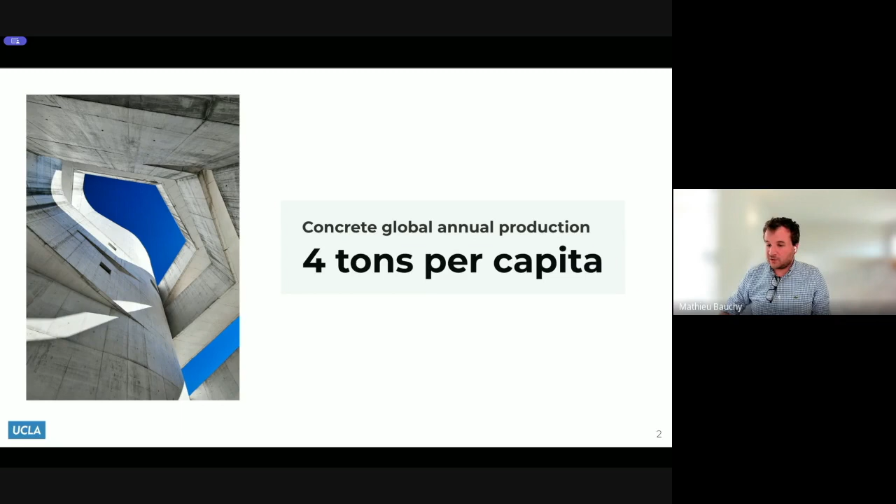And the thing with concrete is that because we produce so much of it, it comes with a cost—the cost of very significant CO2 emissions. Again, it's not so much that concrete on its own is very carbon intensive, but it's more about the scale of how much concrete we produce. So this is really what we have been trying to do, is to see how we can use new developments in AI and machine learning to tackle this and try to reduce this carbon footprint of concrete.

So I'd like to tell you a little bit more about the problem we're trying to solve, the carbon footprint of concrete, and then I'll show you how we have been using machine learning and AI to try to reduce concrete's footprint.

When we think about the carbon emissions due to concrete, it corresponds to roughly 8% of global CO2 emissions. That doesn't seem like a lot on its own, but when you compare it with all the emissions from aviation, which is only 2%, concrete alone is responsible for 4 times more emissions than the entire aviation industry. So it's really a significant contribution, much more than any other material.

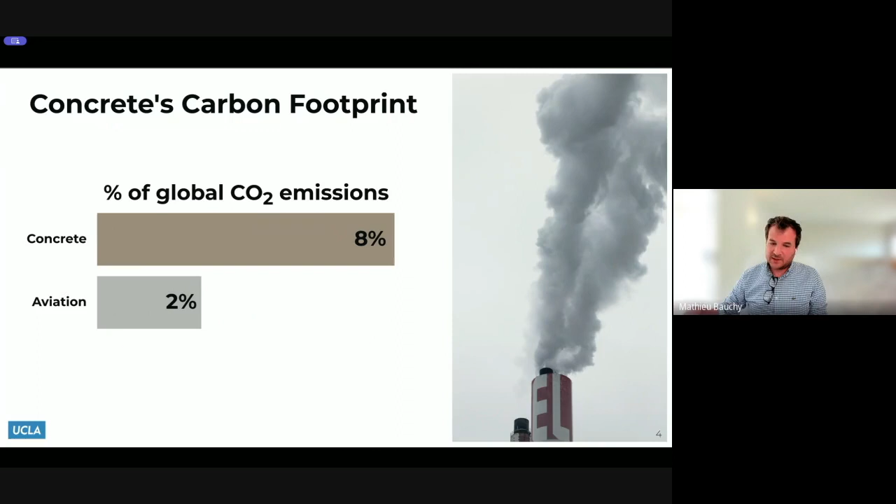So there's really an urgent need. The problem is that, like all other industries, they are decarbonizing—transport has electric cars, energy is transitioning to either nuclear power or green power—but concrete is very hard. It's a heavy industry. There are thermodynamical limitations regarding what you can do to decarbonize concrete. So those heavy industries like concrete, steel, glass, are to some extent the hardest to decarbonize.

When you think about the carbon footprint of concrete, there are different contributions from the very beginning of its production to the very end of the life cycle of an infrastructure. For an accurate description of the embodied CO2 associated with concrete, you need to take all of this into account. You need the A1 contribution—this is the emissions due to raw materials like cement, the aggregates, all the raw materials that go into concrete. Each has an associated A1 contribution due to their manufacturing.

Then you have the A2, which is the transport—we need to transport those materials like cement up to the concrete plant. Then there is the manufacturing of concrete itself, for example the energy consumption of the concrete plant. After that, once concrete is made at the plant, we need to deliver it to the job site, so that's the A4, etc.

Then there's everything related to the use of the infrastructure—any repair, any maintenance, etc. All of this goes into the overall carbon contribution of concrete. And then everything related to the end of life—the decommissioning, the recycling, all of this. What I'm really interested in is the beginning, what we call cradle to gate. That's what I'm going to talk about today.

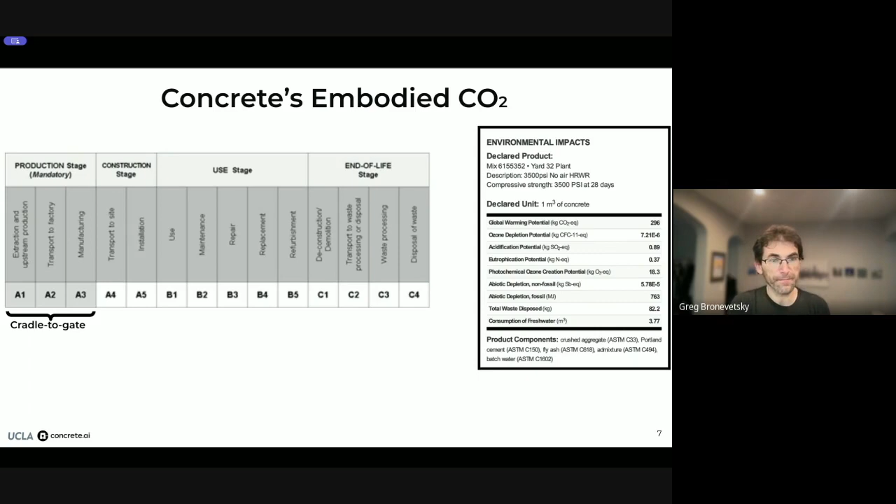Question: what fraction of the overall emissions are these stages? Yeah, I mean, it's like...

Those initial emissions, to some extent, are the best quantified, because there's a clear methodology to quantify carbon emissions due to concrete manufacturing - A1, A2, A3, and then A4 and A5 which is transport, purely the transport in the concrete truck, a fairly small contribution compared to cradle to gate. The problem with everything related to B and C is it's very hard to quantify. You need life cycle analysis, and it's hard to estimate the lifetime of the infrastructure you build, so it's hard to give a good answer about that.

For everything regarding B and C, there are already some good solutions - higher thermal efficiency, maybe alternative solar or renewable energy, things like that. So there's already effort to reduce the service life emissions of the infrastructure. But it's still really the production itself that remains hardest to decarbonize, because you can't use renewable energy for that. So I don't have a good answer about the exact fraction, but it's significant for sure - certainly a decent fraction, probably more than 50% if I had to guess.

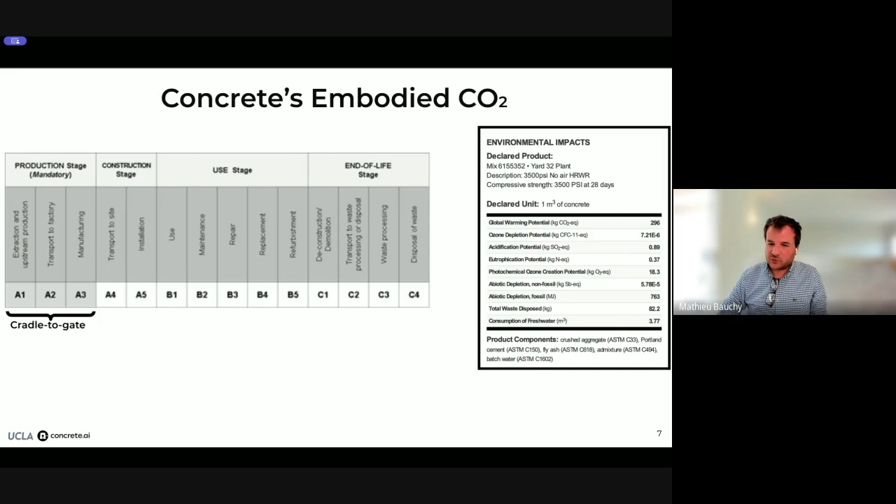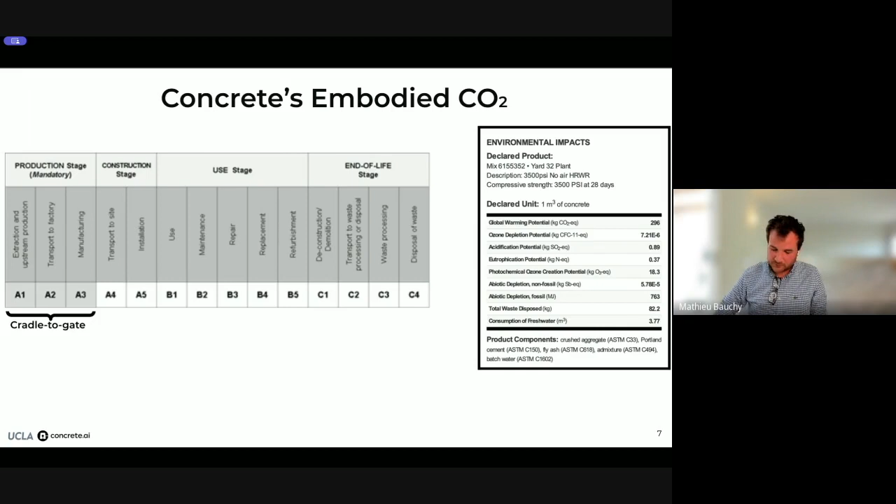Global warming potential is just one of the negative aspects associated with concrete production - that's the one I'll focus on, but there are other hidden costs concrete production has. At the end, what you get is a number - the global warming potential - quantified as a CO2 equivalent, reported per cubic meter of produced concrete. So it quantifies the contribution of producing one cubic meter of concrete.

Here I'm showing one example of the global warming potential of a given concrete with a certain strength. When you look at the breakdown of the A1, A2, and A3 contributions, it's really the A1 contribution - production of the raw materials themselves, meaning producing cement, aggregates, and chemical additives used in concrete - that has the major contribution, the biggest fraction of the global warming potential of concrete.

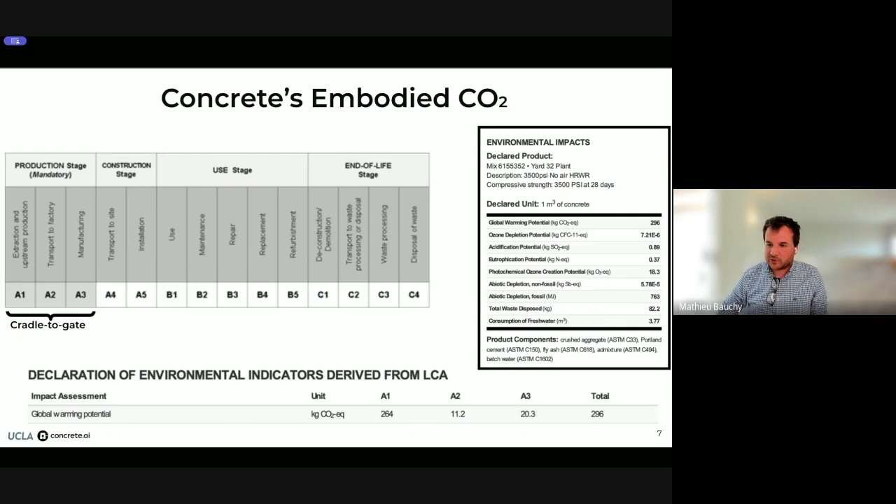So those are the constituents that typically go into concrete. Concrete is something you make by mixing sand, aggregates, water, cement, and some chemical additives. You mix all of this together, and initially you get a gray slurry that you can use to build things, and eventually this turns into a stone.

So it builds strength over time. That's the beauty of concrete. It's a very low-tech material, but when you think about it, concrete is very magical, right? It's workable initially, so you can make it have any shape you want, and it builds strength on its own over time, just by a chemical reaction between water, cement, and all the cementitious material in concrete.

It's gradually going to build strength on its own, right? So it's a very interesting material that is dynamically changing over time. It's really a living material, and this is also what makes it complex to predict the behavior of concrete, because it's constantly evolving over time, over the years. Even years after you have built a given concrete, it's continuing to chemically react.

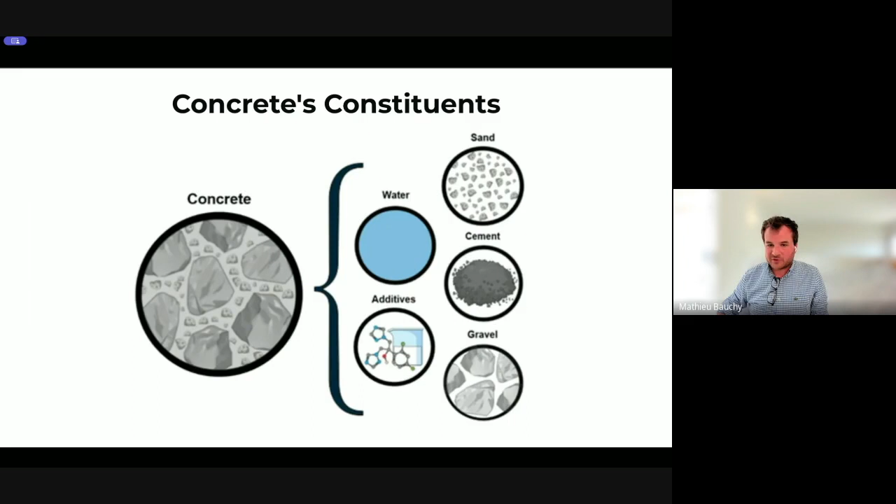So when it comes to concrete, the crux of the matter is really about cement. Cement is one of the ingredients of concrete, and when you look in terms of mass, cement is actually just a small contribution, it's 15% of concrete by mass. But when you look at cost, or even worse, carbon footprint, cement is really the main contribution to concrete's cost, it's 50% of the cost, and about 95% of the carbon footprint of concrete.

So when it comes to reducing the carbon footprint of concrete, what we really mean is, can we reduce the use of cement in concrete? Because anything else that you put in concrete will have its own carbon contribution, but it's fairly minor as compared to that of cement.

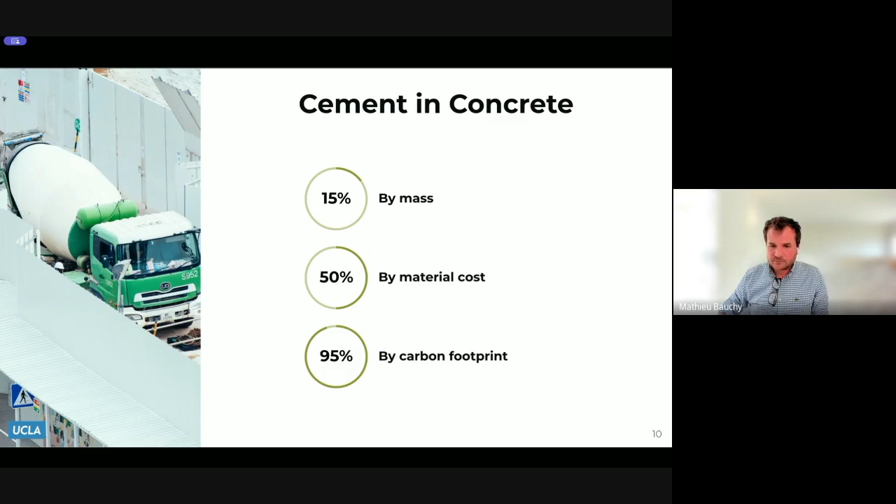So cement obviously is very important in concrete. That's what reacts with water, and that's what gives strength to concrete. But the more we can reduce the use of cement in concrete, the more it's going to decrease its carbon footprint. So this is really what we are trying to do: how can we use less cement in concrete while still keeping the same strength and everything, right? We can't compromise on that. If we decrease the strength of concrete, that can have some serious safety consequences.

So when it comes to concrete, we can't make any compromise on quality, but we are still exploring ways on how we can use the same concrete with the same strength, the same safety, but using less cement, and hence lower the carbon emission associated with concrete.

Question: can you contrast? There are low carbon concretes. Is there a different kind of cement as opposed to less cement?

Yeah, there are many approaches that people have been doing. I would say the easiest one is to try to reduce the amount of cement in concrete, and that can be done in different ways. It can be done by optimizing the concrete itself, for example optimizing the fraction of the different aggregates. It can also be done by using some chemical additives that can increase the strength of concrete so that you can use less cement in return.

Usually the most common approach is to try to replace cement with what we call alternative supplementary cementitious materials, such as fly ash or slag. Those are typically waste byproducts. For example, fly ash is a byproduct of coal energy production, and slag is typically from steel production. So those are some pretty efficient ways to reduce the use of cement in concrete.

The problem is that we're not really using coal as much as we used to, so the amount of fly ash available in the US and in the world is decreasing over time. This is starting to become harder and harder to find materials that can replace cement in concrete. And then you have a completely different approach, like designing a brand new type of cement, things like that.

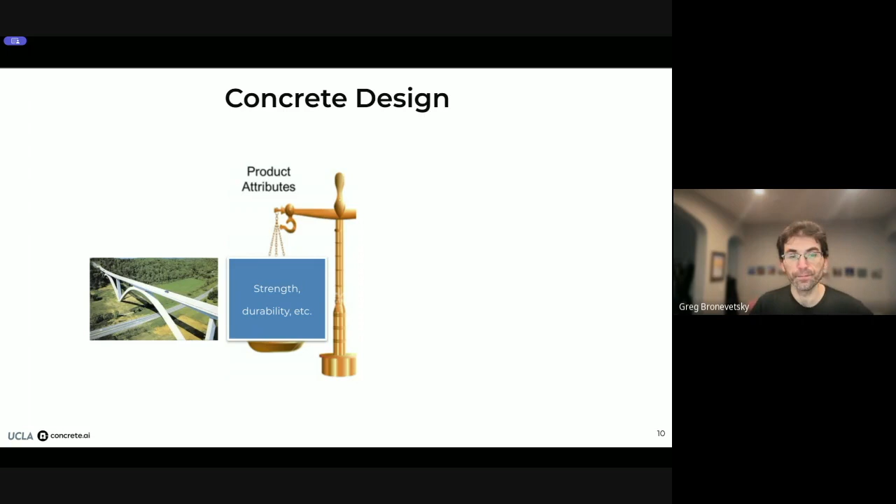So when it comes to decreasing the amount of cement in concrete, the way we do that is by designing new concrete formulations. Making concrete is like making a cake, in the sense that you mix some ingredients with different fractions, and depending on the ingredients you use and the quantity of each of those ingredients, concrete will have different properties.

So when it comes to reducing the amount of cement in concrete and reducing its carbon footprint, we really need to optimize the recipe of concrete - the recipe for how we make this concrete cake. This is really what concrete design is about: how do we optimize the fraction of each constituent of concrete to achieve the attributes we want, in the most economical fashion, or with the lowest carbon potential.

When we design a concrete, we usually have certain attributes in mind - attributes of the concrete product itself. For concrete, usually you want a certain strength, the strength you need to carry some load, whether it's for a bridge, a wall, or anything like that. And then there are certain durability requirements, to make sure the performance of concrete is maintained over time. This is typically what the consumer cares about.

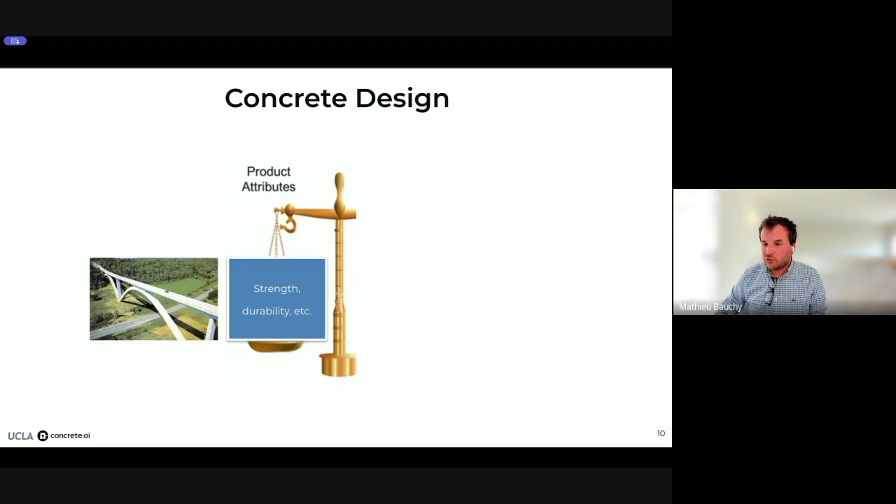But then there are all kinds of manufacturing attributes as well, and that's the case for any material. It's not just about the property the customer cares about - it's also about whether it can actually be made, and how easy it is to make.

In the case of concrete, there are several factors, like the slump. The slump characterizes how fluid concrete initially is. To build something, you need concrete to initially be like a liquid slurry that you can use to adjust the shape of the concrete - that's dictated by the slump. So that's another factor - it's not just about strength.

There's the slump, the setting time - setting time dictates how long it takes for concrete to turn into a solid stone. Most concrete is usually pumped, so we need to make sure it can be pumped through a given pipe. So designing a new type of concrete that would be greener isn't just about ensuring it has the right strength.

There are many requirements to make sure it can be used in practice. If you think about this mathematically, it's a multi-objective optimization or multi-constraint optimization.

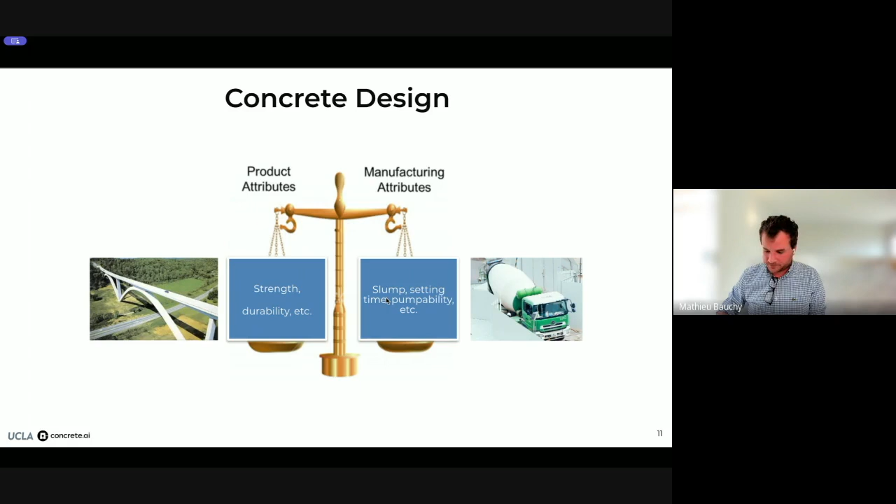So this is really what can be formulated as a mathematical optimization, in the sense that you have a cost function - this is what you want to reduce. In this case, we want to reduce the global warming potential of concrete. Then you have some degrees of freedom that you can adjust. In the case of concrete, we can adjust the constituents and the quantities of each of those constituents - those are the degrees of freedom.

And then we have certain constraints - it's really an optimization under constraints. The strength needs to meet a minimum level. We need to ensure the slump of concrete is within a certain range. There's a whole range of constraints, usually dictated by the application of concrete - depending on what you build, whether it's foundation, walls, or slabs on grade, etc. Each type of concrete will have a given strength target.

So it's not a unique optimization - it has to be done application by application. But yes, you can formulate that as a mathematical optimization where you're trying to reduce a certain cost function by adjusting some degrees of freedom while ensuring a certain number of constraints are met.

So when it comes to the degrees of freedom of concrete, it's really about adjusting the constituents. What I'm trying to talk about today is a very pragmatic approach of what we can do today with the materials that we have in concrete, without changing fundamentally the way concrete is made. When we discussed earlier about all the different approaches to make green concrete, there are really many different ways, including designing some brand new types of cement, or maybe designing some concrete that doesn't rely on cement at all.

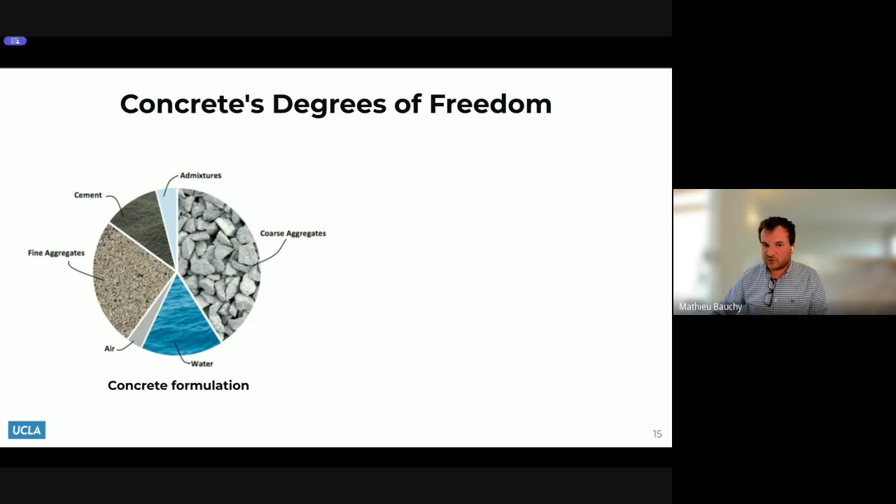A very simple pragmatic way to do this is to use the materials we already have, and see if there's some room to optimize concrete by just slightly adjusting the fraction of each constituent, like cement, chemical admixture, aggregates, sand. Can we, by simply changing the fraction of those constituents, reduce the amount of cement, make the concrete less carbon intensive, and still keep the same strength? That's really what I'm trying to discuss today.

Again, a very clear opportunity in that regard is that cement can be replaced by some other alternative materials, typically fly ash, slag, or silica fume. Those materials have been shown to be efficient in replacing cement, but every time you replace cement by one of those materials, it's going to impact the strength of concrete. Those materials might not already be available everywhere, and they might not be cost efficient.

So it really depends on the location in the US. Some locations have access to cheap fly ash when they are close to a coal power plant. In California, unfortunately, we don't really have that. So fly ash, slag, those are all very expensive materials here. This is really something we can't do at the national scale. It needs to be done state by state, and probably even plant by plant, because the materials that are available, the price of those materials, and the transport of those materials are going to be very dependent on where the concrete is being produced.

A question. Does Portland cement, is that generally available?

Yeah, so I mean, it's available. The only question is how far does it need to be transported, and how is it transported? We have some cement plants in the US at various locations. So it is available.

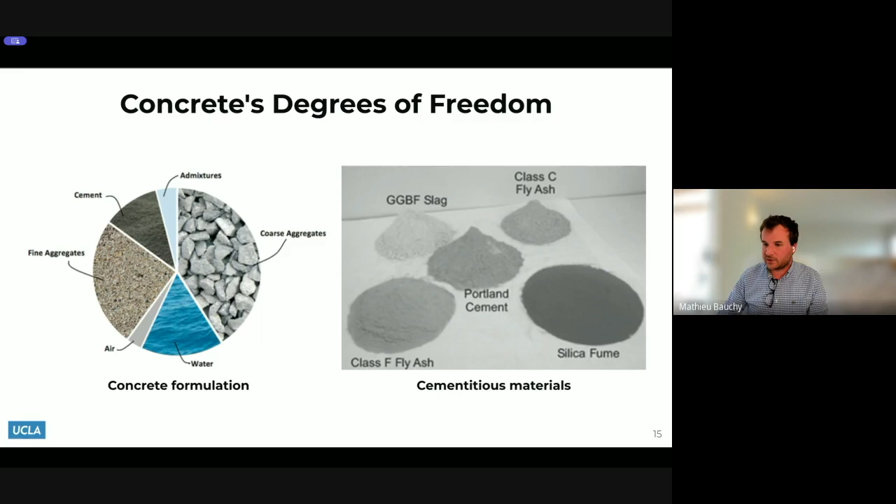So the question is, let's say you want to design a new concrete. You need to figure out how to mix those materials together in certain quantities, so that's really a typical optimization problem. The question is, can it be solved by brute force? For this, you can try to estimate how many solutions can be considered when you design a new concrete. Of course, the number of solutions is virtually infinite, because you can mix those materials in an infinite number of possible ways—it's a continuous problem.

But if you try to estimate the number of possible concrete formulations that can be made, this is a fairly conservative estimation, considering you have access to only one cement, one fly ash, one slag, one type of sand, one type of stone, and one type of plasticizer. If you think about the minimum and maximum amount of those materials, and what could be a typical increment to consider, you get about more than 13 billion possible solutions. So even though concrete is just mixing a few materials together, the number of solutions to this optimization problem is very large—at least large enough that you can't really solve it in a brute force fashion.

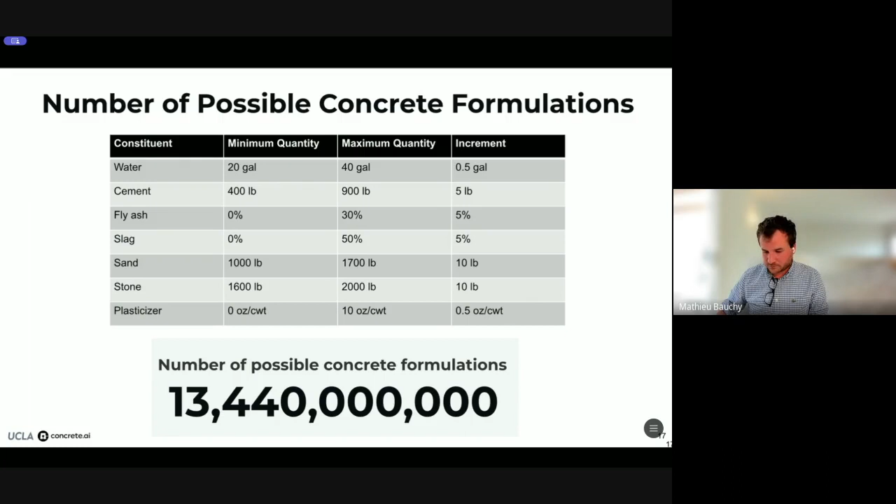And the premise is that this is just for one optimization, but when you look at a given producer, typically in their plants they will have several hundred different concretes that they mix. This is due to the fact that there isn't a single concrete formulation that can do everything. Concrete has many different applications, whether it's to build walls, foundations, things like that. Every concrete formulation has a distinct set of performance requirements, distinct constraints, distinct requirements. So there are several hundred concrete formulations that every plant would have, and you need to do this optimization many times, for each plant. So it's a complex problem if you want to do it at scale. That's why we think machine learning can help in that regard, because it can be used in a high throughput fashion to solve this kind of problem.

Okay, so let me talk about...

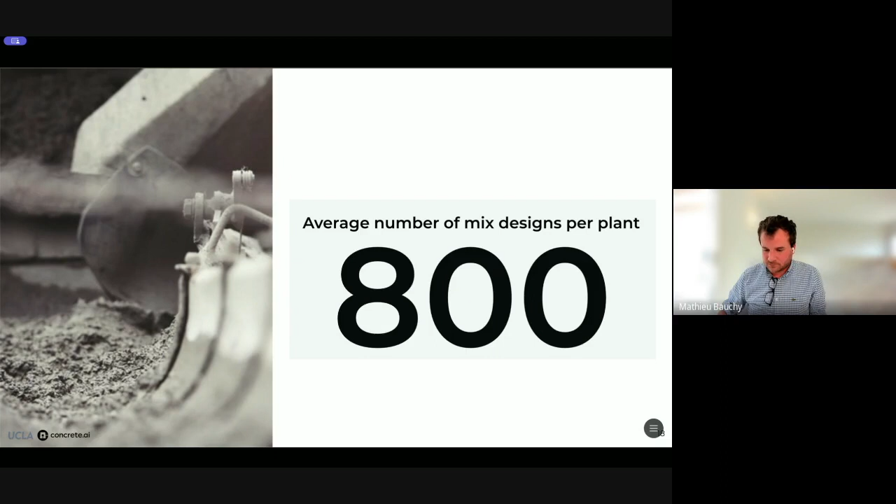Oh yes, sure. Do you have the ability to simulate the outcomes of these samples, or is it more like physical experiments are required?

Yeah, so of course, that's what we want to do with machine learning, but there is no other way. There is no chemical or physical model that allows you to predict what the performance of a given concrete would be. So you can't really simulate that like you would with typical materials.

There are really three main difficulties. The fact that concrete is a material that is constantly evolving over time—it's a complex chemical reaction that occurs between the cement and the water, and continuously changes over time. There's the fact that concrete is a very multi-scale material: you have what's happening at the atomic scale, but then there's a mesoscale, like microstructure, and several different scales in concrete, each having an impact. At each of those scales there are some modeling tools—at the atomic scale you can do molecular dynamics, you can have continuum methods like FEM to model what happens at the continuum scale, things like that. So each of those scales can be modeled, but when you consider concrete as a whole, it's very complex to model it all together.

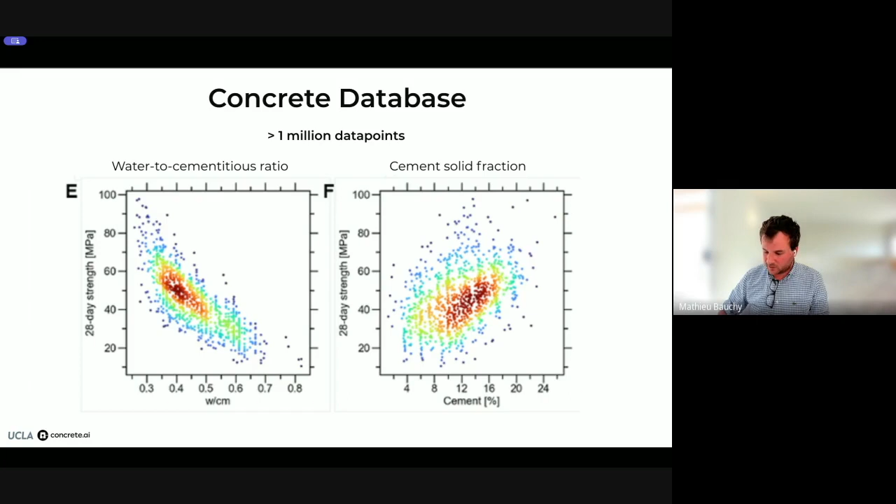So the formulation of concrete is one thing that matters, but at the same time it's both a physical and a chemical problem. The exact chemistry of the cement you use in concrete also matters. So when we want to make predictions about the strength a certain concrete will have, it's not enough to know how much cement you're using - we need to know the exact chemical composition of the cement. That's what also makes concrete a very difficult material to work with - it's both the physical and chemical characteristics of the materials that matter.

So we have a second database that we use, which contains several thousand cements with different chemical compositions. That's what we use to infer the role of the chemistry of the cement in the performance of concrete.

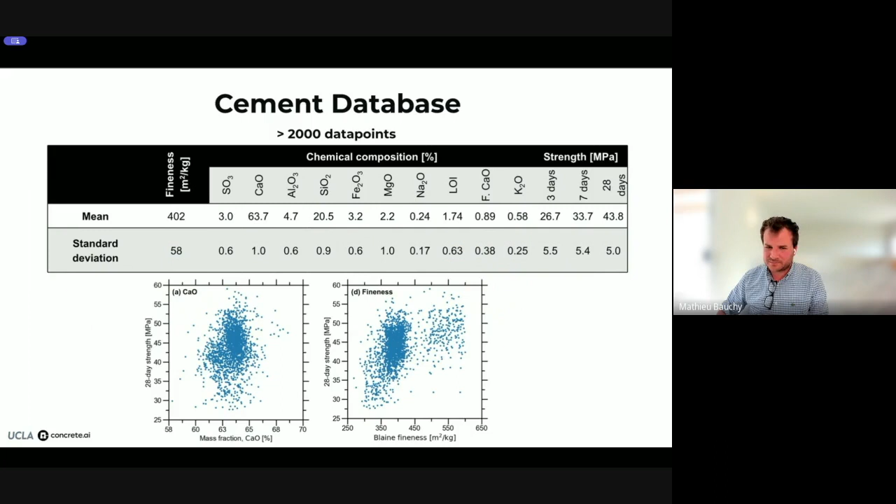And then we need to also have this for any other kind of material that we use to replace cement with. For example, fly ash is typically the main material that cement is replaced with. So we have the same types of information here, where we have accumulated about 20,000 different data points for a fly ash of different compositions.

Fly ash is typically like a calcium aluminosilicate material. Depending on the fraction of calcium, silica, and alumina that you have in fly ash, it's going to have different types of reactivity. It's going to impact the strength of concrete in different ways. So we need to explicitly take this into account when we predict the performance of concrete, because fly ash is very heterogeneous. The properties of fly ash can change a lot from one plant to another, and it can change over time. So we need that level of detail to really be able to make some predictions.

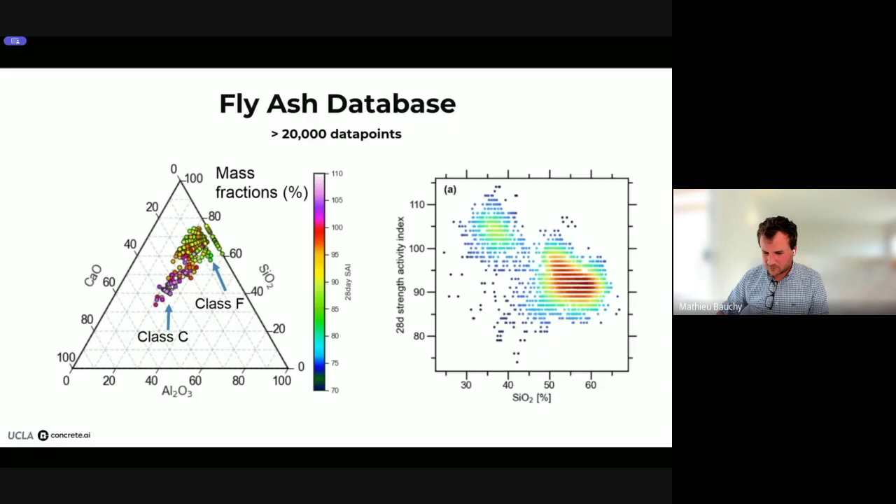So that's the first thing: getting some data. But now that you have the data, data involving concrete is one of the noisiest data that you can work with. So we need some robust way to deal with outliers in those types of data sets.

There's many different reasons for which you may have outliers in a database, whether it's for concrete or for any kind of database. It can be an experimental error. It can be an error when batching the concrete. So maybe there is an error on the weight of certain materials.

But an outlier is something that doesn't behave as expected, right? And it can also be that there's a new type of concrete with a specific combination that gives you something unexpected, but that doesn't necessarily mean that it's an error, right?

So it's really a challenge when we work with concrete datasets to be able to clean the database, to remove those that are associated with actual errors, whether it's a typo, unit conversion, etc., but also to keep those data points that may not behave as expected but are actually true behavior, because maybe those are the ones we care the most about. If we really want to find a new type of concrete that has a much lower carbon footprint but still high strength, maybe this is going to initially appear as an outlier. So we can't just remove everything that doesn't appear to behave as expected.

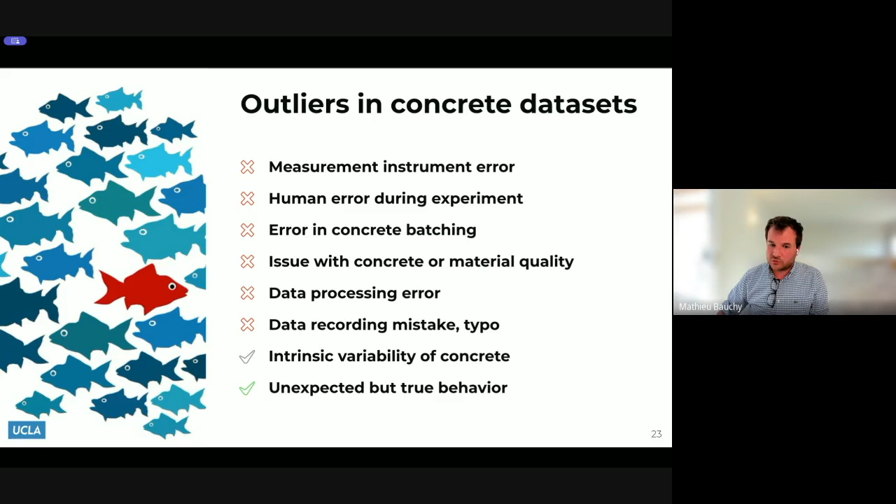So we spend quite a bit of effort on developing some tools to identify outliers, and that's one approach that we have been using here. I won't go into too much detail, but basically the main idea is that there are many different algorithms to detect outliers, and each of them might be good individually.

But the approach that we have been using is to rely on an ensemble of outlier detection algorithms. The idea of this approach is that we start by building a pool of outlier detection algorithms. This can be density based, by looking at the density of data points, distance based, angle based, etc. So we take a pool of, let's say, 20 different types of algorithms to detect outliers.

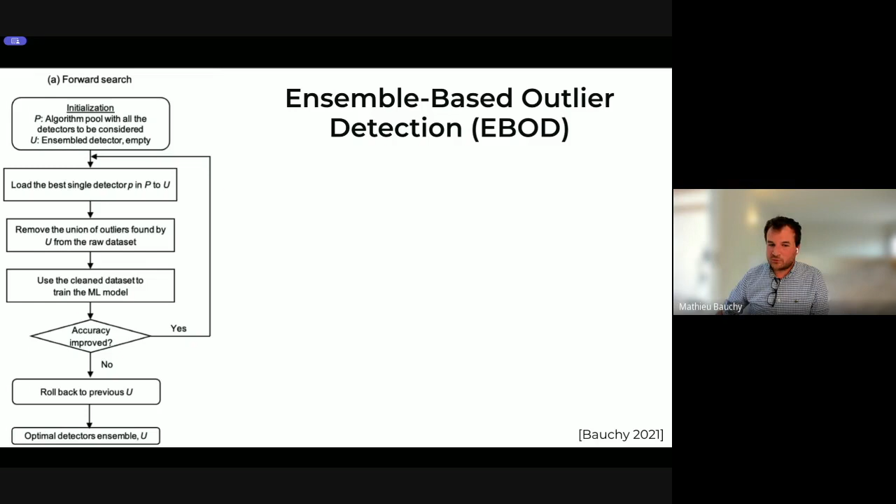And then we do either a forward or a backward search to find what's the most efficient ensemble of those outlier detection algorithms to maximize the accuracy of the models. So this is really the idea of finding, for each specific problem, what's the most efficient combination of those outlier detectors.

The way it works is typically we start with the raw data sets, then we add outlier detectors one by one. At each step, we find what's the most useful outlier detector algorithm to add. And what we typically observe is that as you start adding outlier detection algorithms, the accuracy starts to increase.

And then at some point, when you start to remove too many outliers, the accuracy starts to decrease again, because you're starting to remove points that are actually useful for the model to learn the relationship between concrete constituents and concrete's performance. So basically, that's where we know we have found the optimal combination of outlier detection algorithms.

So that's the approach that we have been using. We call it the ensemble-based outlier detection, or EBOD. At least for the case of concrete, it has been an efficient approach to really find the best balance between cleaning the data sets, but without removing those data points that are actually useful for the model to learn how to make predictions.

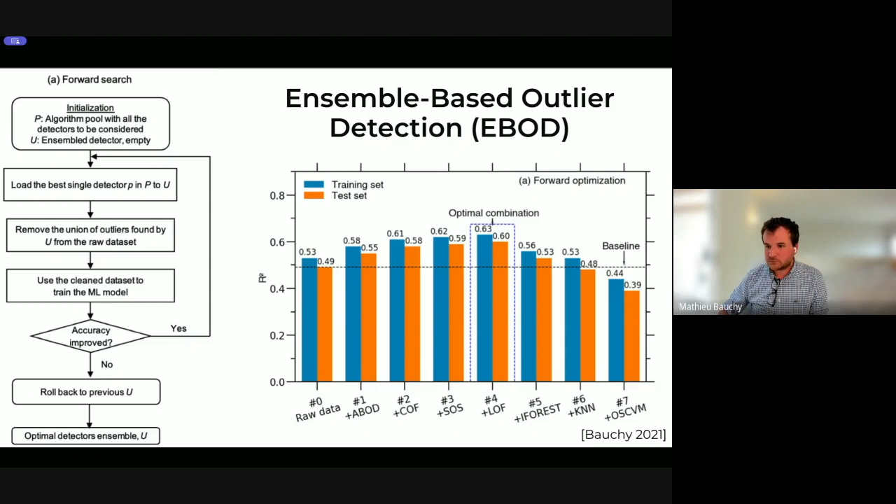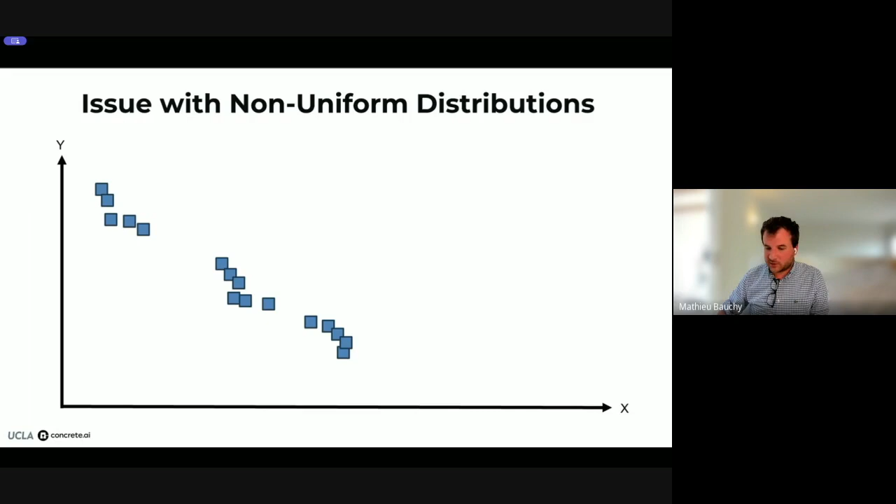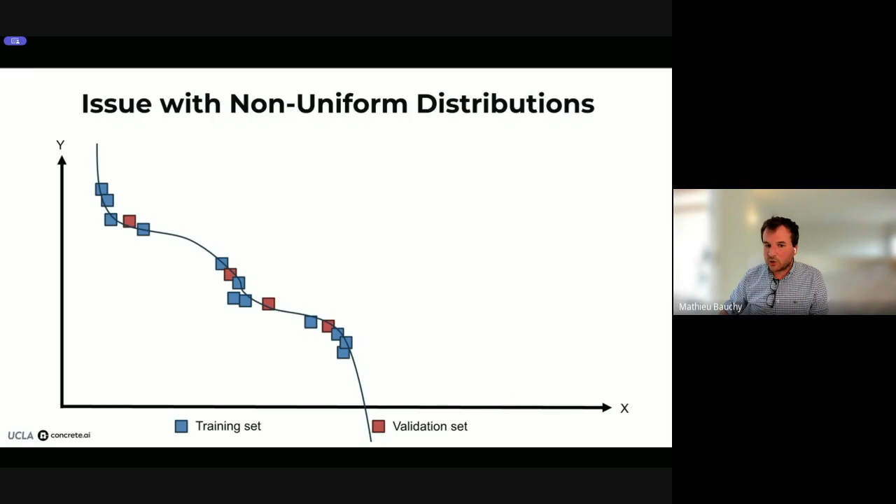So then there is a distinct issue that's specific to concrete, but also for materials in general, which is that typically we work with distributions that are not uniform. This creates unique difficulties when using machine learning, because if you take a typical cross-validation approach, randomly splitting your training set into a validation set, with non-uniform distributions you can have models that are obviously overfitted, fit the data very well, and give you a very good validation score. But those models wouldn't be good at predicting the performance of new concretes not already in your datasets. That's a common approach we see in many publications. If you just rely on random cross-validation, you tend to inflate the performance of your model, but it doesn't really reflect how good the model is at discovering new materials.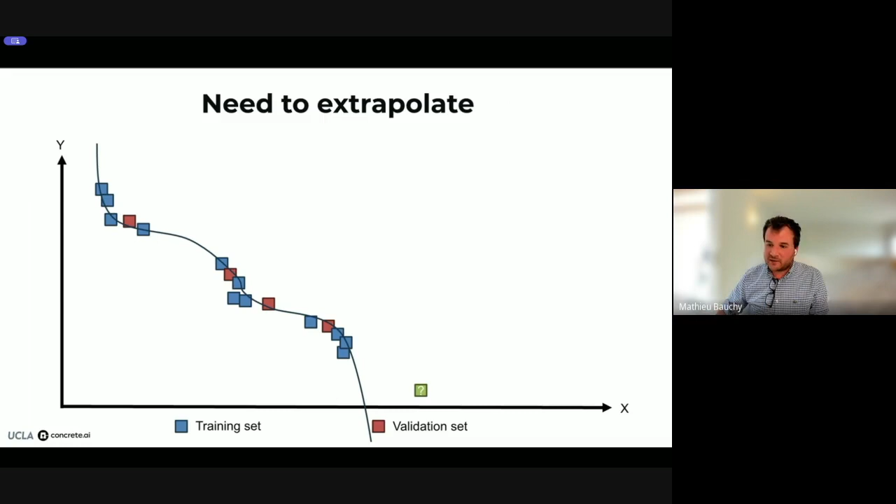So the approach we're using instead is trying to find ways to have a model that can extrapolate and predict the performance of new concrete that would be very different from what we have in our training sets. For this, we need to favor models that can extrapolate outside the range of the training sets, and that can reasonably generalize outside of the training sets. The approach we've found to be most efficient for that is a leave-one-cluster-out, or LOCO cross validation.

The idea is that first we take our datasets and group them into clusters, clusters of data points that look like each other. We can use different approaches for that, but probably even a simple k-means algorithm would work reasonably well. Once we've grouped the data points into clusters, rather than doing a random train-validation split, we take all of those clusters one by one and do a cross-validation where we isolate one cluster that becomes the validation set, and all the other clusters become the training set. We do that in a cross-validation way, using all of those clusters as a distinct validation set.

Then we adjust the hyperparameters of the model to reduce the validation error as much as possible. So we still keep the same idea of cross-validation, but we do it cluster by cluster rather than with a random train-validation split. When we do that, we find that on average this yields a much simpler model, one that tends to be more linear in nature and can extrapolate better outside of the range. They are really trained to learn from one cluster and extrapolate to the next. So those types of models tend to be much better at making reasonable extrapolations outside the range of the training set they're trained on.

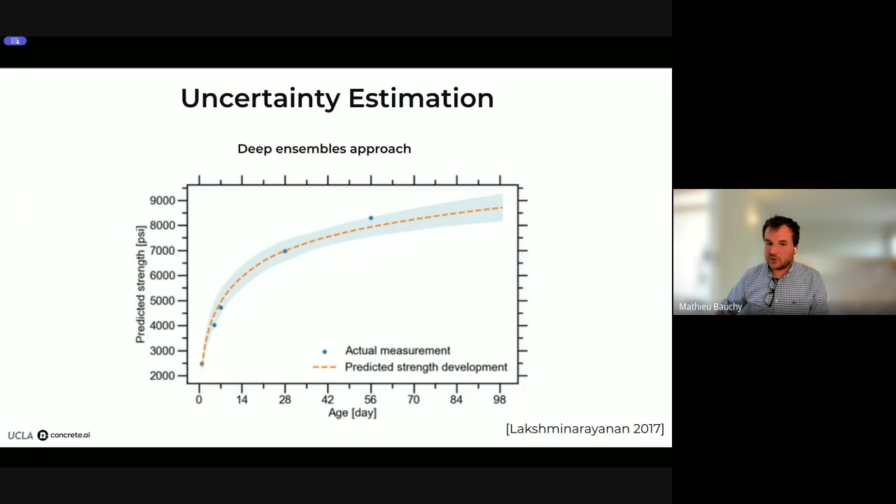Then the next thing is, again, we need a good way to estimate uncertainty. Uncertainty can come in many ways. Maybe in our database we have several concretes that are close to each other but with different strength, and in that case we need our model to be aware of that. But also, whenever we extrapolate, we need to make sure that the more we extrapolate, the uncertainty of the model increases. For this we use an approach based on deep ensembles. Rather than training a single model, we train an ensemble of deep learning models, and we use that to estimate the uncertainty of every prediction we make.

So strength, shrinkage, slump - when we look at this, it gives us an idea of how good the model is. We don't expect R square equal to 0.99 or anything like that, because we're satisfied when the accuracy of the model becomes comparable to the uncertainty of the measurement itself. When it comes to concrete, if you measure the strength of the very same concrete, you will get different answers every time.

A typical strength of concrete varies with a standard deviation of about 500 psi. So the way we looked at those models is we look at the accuracy, for example the root mean square error, and check if the accuracy is comparable to the uncertainty of the measurement itself. This is typically what we are able to achieve with those models. They do come with a fairly high uncertainty compared to other types of materials where you can have higher accuracy. But we do expect that for concrete, because of the variability of concrete as a material, and the fact that measurements come with significant error when you repeat the same experiment several times.

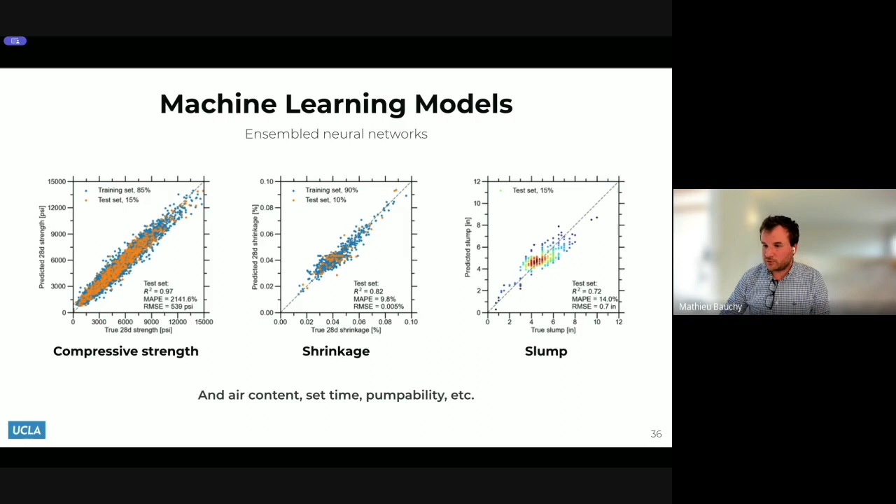So we're coming back to this optimization problem: we're trying to reduce the carbon footprint of concrete, and for this we can adjust the constituents of the materials concrete is made of. Now we can solve this optimization much more efficiently because we are modeling our cost function in terms of a neural network.

The idea is that now that we have those machine learning models, we use them to solve this optimization problem, and this needs to be done concrete by concrete. We start with, for each concrete, what strength do we need, what target slump do we need, what materials do we have access to at a given plant, and based on that we solve this optimization problem with the machine learning models we have for each property.

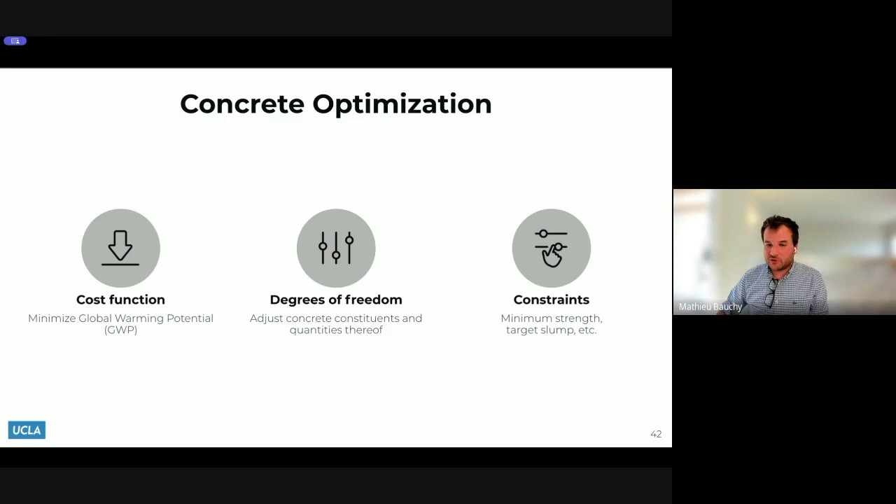Let me show you an example of the kind of result we get. I think one way that is interesting to test the accuracy of those approaches is to compare them with what a human would do. So here the test case is that we worked with concrete producers.

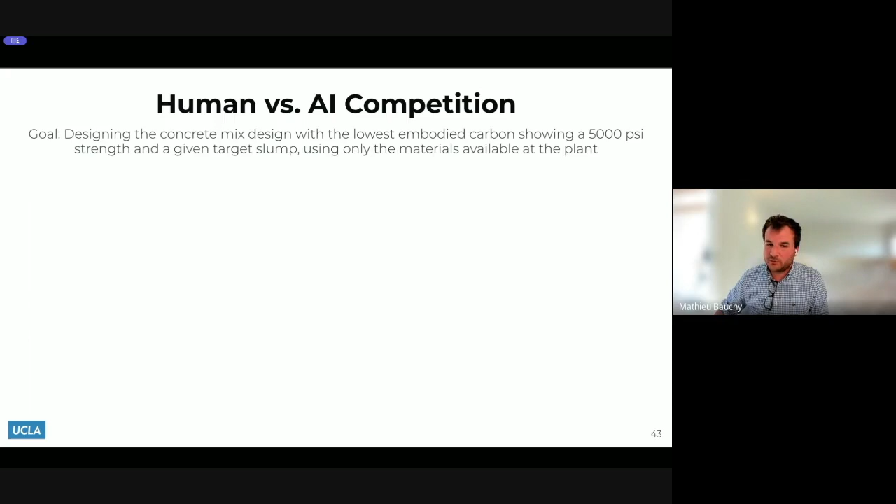We went to a certain plant in the San Jose area, and we asked the local expert - the local quality control producer - to design a concrete that would have the lowest possible embodied carbon with a certain minimum strength and a given target slump. Then we asked AI to do the same, and we compared what the human was able to do with what the AI was able to do.

So the very first thing is, did the concrete being produced actually meet the strength that we wanted? Here I'm showing 3 results. The green is the strength of the concrete that was discovered by AI, and in this case the strength was indeed higher than the requirement of 5,000 PSI.

In blue, that's the strength of the concrete made by the human, which I think illustrates one of the weaknesses of humans, that when we're trying to optimize, sometimes we can be a little bit greedy. In this case, the concrete optimized by the human was actually slightly short on strength.

But when it comes to machine learning, for each concrete we can predict its strength, but we can also predict the uncertainty of this. So we have those 2 aspects to make sure that when the AI recommends a concrete, not only do we predict it will have a given strength that exceeds the target, but we also have the uncertainty of the predictions to make sure it will confidently exceed the target. That's something humans typically don't have. Humans have some intuition to predict the strength of a concrete, but not necessarily the uncertainty of that prediction. So that's, to some extent, one advantage of machine learning over humans in that respect.

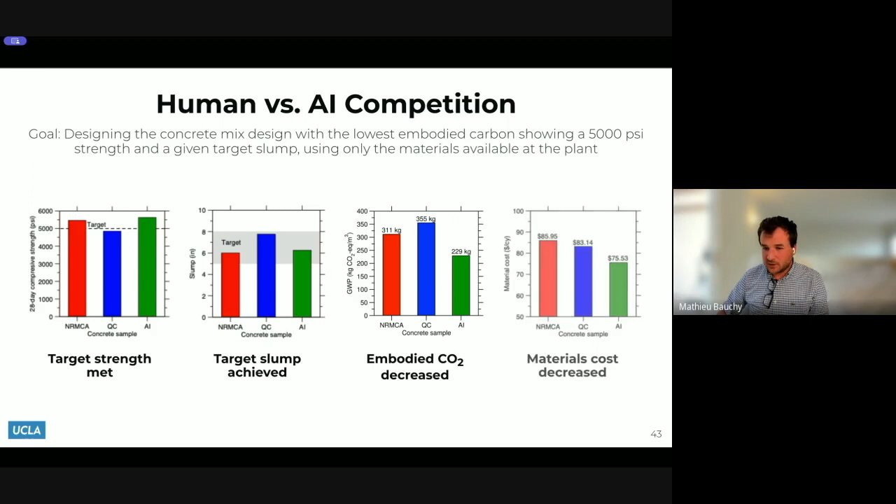So this illustrates how much we can reduce the CO2 emissions of concrete simply by using the materials we already have and finding ways to better optimize the fraction of each material that goes into concrete. One thing that was also interesting is that usually when we think about green concrete, we think of something more expensive than the concrete we are making today.

But in this case, since the goal was really to reduce as much as possible the cement in concrete, reducing cement is also good for the cost, because cement is the most expensive ingredient inside concrete. So the concrete mix found by the AI was actually more economical than the one found by the human. In this case you win on both fronts - not only a concrete that's more economical and cheaper, but also with lower carbon emissions. So it's one example where you have a greener alternative that doesn't come with any cost premium and is actually cheaper than the reference used so far.

So again, those are some results that were obtained in California. California is a very distinct market because there is no cheap fly ash available, so those results may not replicate in the same fashion in other regions in the United States.

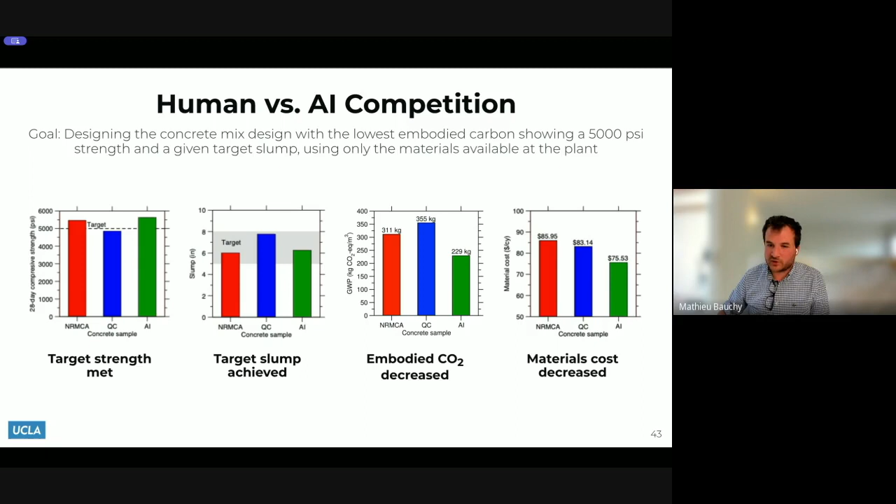It's hard to understand sometimes what the AI recommends and why it recommends that instead of another formulation. But what we can do is use some SHAP analysis to try to interpret the reasons why AI recommended a new concrete formulation.

The way we do that is we decompose: we look at the concrete suggested by the human, then compare it with the concrete suggested by the AI, then look at each difference one by one, like for each input, what's the difference between those two concretes. Then using the machine learning model and a SHAP analysis, we can isolate what was the contribution of changing each of those inputs one by one.

How did it affect the strength? How did it affect the cost and the carbon emission? That gives us a way to try to interpret what the AI did, even though in practice it's more like a black box, and sometimes it gives answers that are very hard to understand. But at least those tools give us a way to get some intuition about why a certain concrete was predicted.

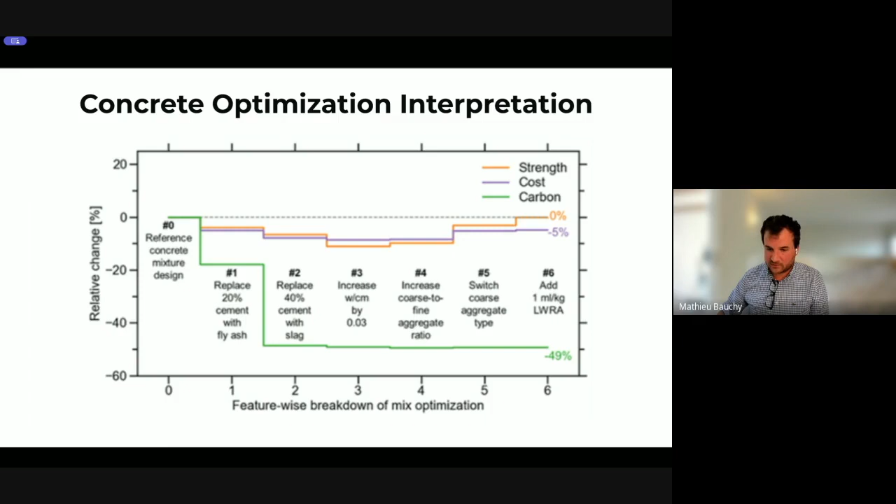I'm going to skip that and just show you some final results if we still have a few minutes, about how we do this at scale. So far I showed you one result for one producer at one plant for one mix, but if we really want to have an impact, we need to do this at a much larger scale.

When it comes to going from a pure laboratory scale optimization to something at a much larger scale, there are a certain number of challenges. The first, I mentioned before: depending on where you are in the US and in the world, the materials will be very different. Materials are very regional in concrete. Typically you use only materials that are locally available, you can't transport them over large distances. So it needs to be done almost plant by plant. We can't really optimize concrete nationwide or anything like that.

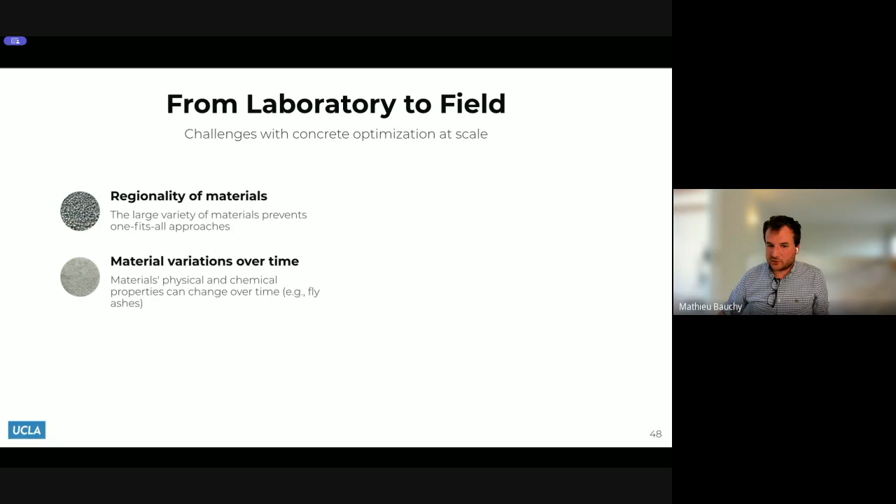The concrete is made of materials that can change over time, like the aggregates, the cement, the fly ash, all of those things. Those materials have certain types of variation over time, so we need to take that into account when we make predictions. We need to account for the variability of materials over time.

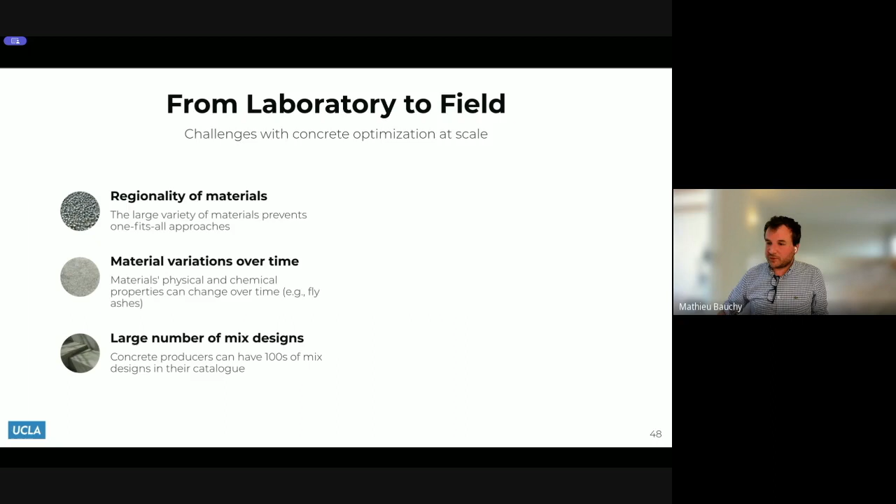That creates a challenge. There's another challenge that comes from the numbers. There are several thousands of plants in the US, and each of those plants has in their catalog several hundreds of concretes, each having certain strength requirements, slump requirements, etc. So it needs to be done at a very high throughput fashion if we really want to have an impact.

Concrete is a material that is very variable, so it comes with many uncertainties. It's not just about the material you're using - there's also the type of truck, the type of plant used to make the concrete, the temperature. All of those things eventually affect the performance of concrete, so we need to take that into account as well.

Then when it comes to concrete, there are some properties producers care about that are actually hard to quantify - whether a concrete is pumpable or finishable. Those properties don't have a very standard test, and yet they're important, but they don't come with a clear number. So we need to incorporate that more qualitative estimation of concrete into those models.

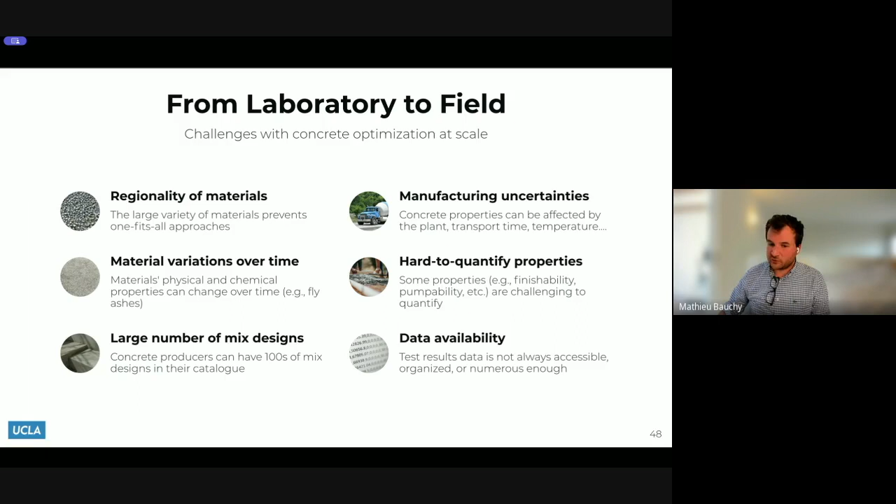And then there's the issue of data - producers don't necessarily have a good way to store their own data, and that makes it hard to access that data and build those machine learning models.

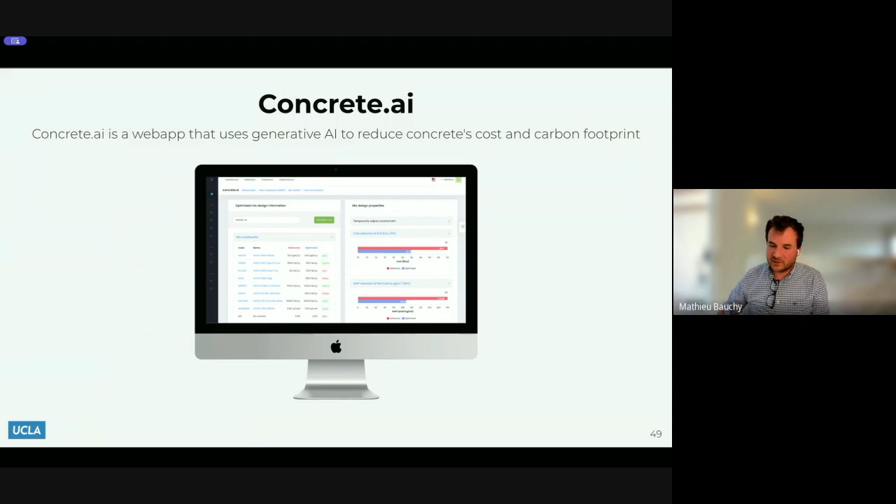So the way we're addressing that is by trying to build more of a software solution that can solve this at a much larger scale. We call this Concrete AI. The idea is to build software that connects to the database producers are using, and directly optimize, in an automated way and high throughput fashion, their concrete using their material and their data. It's more like a software solution we're trying to develop.

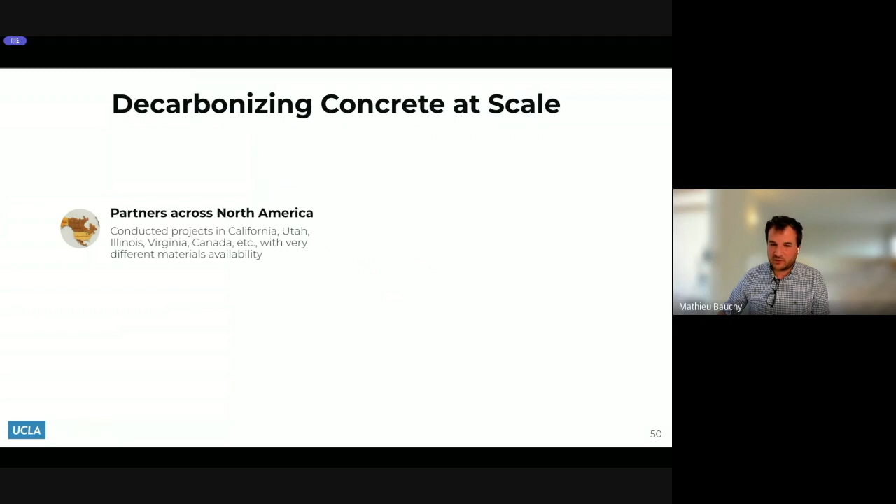The key idea is that we need to do this with as many partners as possible, because that's how we get as much variety in the materials the machine learning models are exposed to. To some extent, that's much more important than the machine learning models themselves - we need to have tools that can have access to the data.

So we build some APIs to directly connect to the software that concrete producers are using to directly extract their data and use them to build the machine learning models.

We develop a high throughput optimization approach that can optimize all the concretes at a given plant all at once in a high throughput fashion. And we also move towards using active learning to really take into account how the performance of the materials in concrete is changing over time, and to adapt the machine learning models accordingly.

So I want to finish by showing you a couple of results that we got. So far, using this approach, we have already optimized about 2 million cubic yards of concrete. This is still very small compared to the national production of concrete, but that starts to be a pretty large scale optimization, at least much larger than what we can do if we just work in the lab.

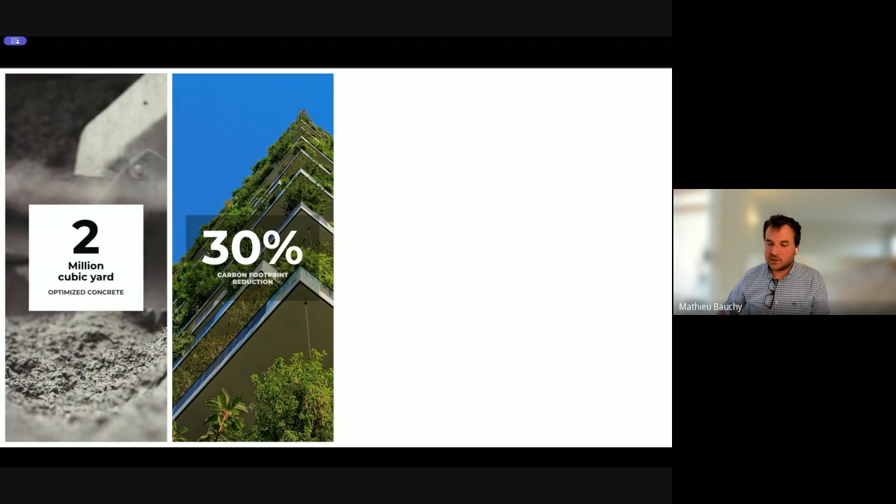As of now, the result we got is on average a 30% reduction in the carbon footprint. So clearly it's not completely solving the carbon problem of concrete. There will need to be some other solutions, but this one has the advantage of being directly accessible with the materials and plants that we have now. So it's more like a low-hanging fruit that can help us reduce emissions tomorrow while we wait for other approaches to decrease the carbon footprint of concrete even further.

Again, one thing we noticed is that it doesn't come with any kind of cost premium, and that's really important in concrete. Concrete is a commodity material, and especially in the US and Europe, people are willing to spend more to get some green concrete. But when it comes to developing countries like India or China, where most of the concrete is made, we can't expect them to pay more for concrete, right?

For example, when it comes to China, every 2 years China produces as much concrete as the US did during the entire 20th century. So this is where most of the concrete is being made right now. They start to care more about the carbon footprint of concrete, but those developing countries have a need for infrastructure, and we can't expect them to really pay more. So this solution has the advantage that it's not increasing the cost of concrete—most of the time it's actually decreasing the cost.

Just to give you an idea, this is more like a blue sky number, but it's what we estimated: if everybody was using AI to optimize their concrete in the world, we would prevent about 500 million tons of CO2 from entering the atmosphere annually. Just to give you an idea, this number is more than the annual emissions of a large country like France.